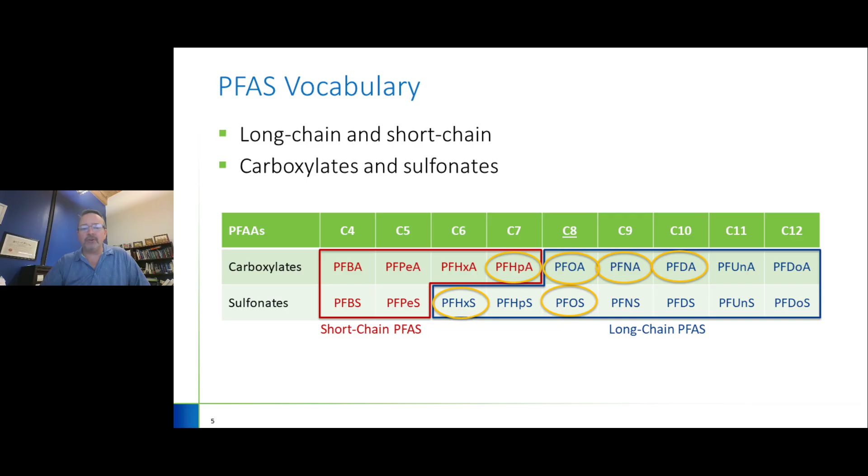Long chain PFAS are easier to remove, generally speaking, than short chain PFAS. The long chain PFAS are the ones that bioaccumulate in a person's body as well, and so that makes them important. If I picture bioaccumulating these long chain PFAS in the tissue of my body, intuitively that doesn't sound good, and they can build up over the years and cause me harm. So long chain PFAS has been the target predominantly, but short chain PFAS have come into greater focus in recent time.

We're going to talk about where these come from. This presentation is largely not a question of who done it, right? We're not trying to find the guilty parties. That's not the mission of this presentation. But inevitably, water suppliers or the customers will ask, where does this stuff come from? And it could come from a whole bunch of different places, which is fairly disturbing, right?

Facilities that use firefighting agents such as AFFF, aqueous film forming foams. Facilities like airports or fire stations have used AFFF for decades, and that is a PFAS-containing product. So if we're near, say, a military installation or an airport, an industrial facility that trains to fight fires, AFFF may have been used and may be a source of PFAS contamination when released to the environment. You can picture people being trained to put out fires, foam gets sprayed everywhere, and after the training is done, it's washed down into the stormwater and into the ground. So that's a common pathway.

Manufacturing air emissions is a disturbing pathway for PFAS. They can travel through the air, like the second bullet suggests. That's been the case in upstate New York, southern Vermont, southern New Hampshire, where deposition of PFAS through the air has been seen. And then there are other sources, right? Landfills are another potential source of PFAS release. It's been seen to be true.

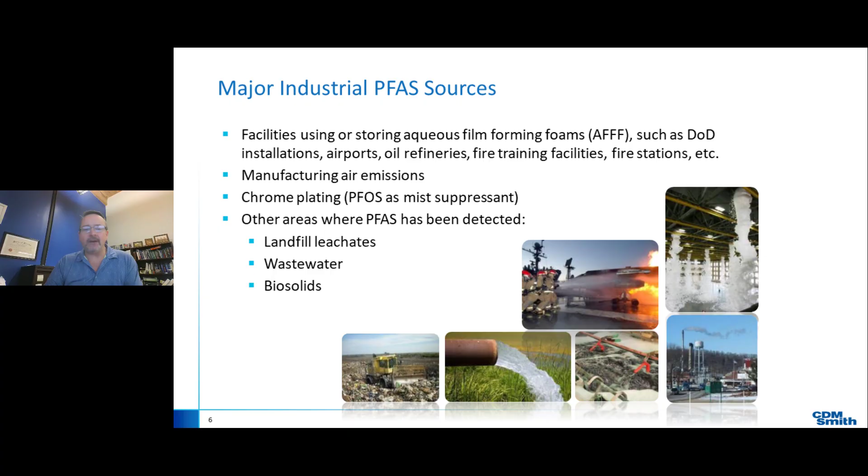Wastewater plants, unfortunately, are the unfortunate receivers of PFAS. Nobody should be mad at the wastewater people by any means, but it's received at the wastewater plant, as you can imagine. And inevitably, some of that can end up in the biosolids, which has been the subject of conversation in that aspect of our water wastewater industry. So PFAS is all around us, unfortunately.

Back in the good old days of 2013, UCMR3 had systems of a certain size, larger systems, looking for 6 PFAS compounds. So it was a select group of utilities at that time looking for a select group of PFAS. They were also looking at a very high detection limit relative to the detection limits that are available now. UCMR3 had a detection limit somewhere in the range of 10 to 90 parts per trillion, whereas now we're a good fraction of that, 1 to 2 parts per trillion.

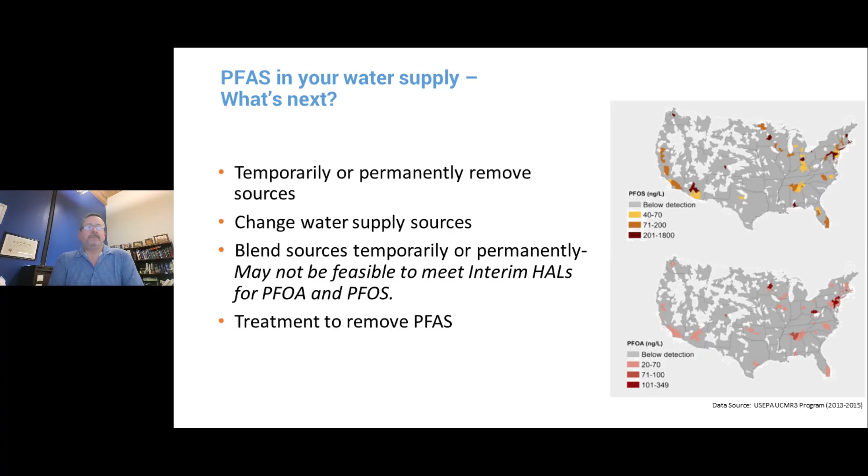Then, of course, fourth bullet, treatment to remove PFAS. We'll talk about that a good deal in this talk. I've alluded to the evolution of PFAS analysis. I don't come to you as a laboratory professional per se, but there are a variety of methods out there. US EPA method 537, 537.1 came along and expanded the list of analytes. UCMR3 had their own limits, which I alluded to earlier.

I should note that UCMR5, not on this slide, but UCMR5 is very convenient to the user in that they steer you toward what laboratory methods are acceptable for use under UCMR5. So again, point is that the evolution of laboratory methods has been noteworthy over the years. More in the way of evolution or progress over time, if you will.

The US EPA back in 2009 had a health advisory. They said, gosh, PFOA, PFOS, they look like bad actors, and we're going to put a health advisory, 400 parts per trillion, 200 parts per trillion. And those are very big numbers compared to what we're seeing now, right? 2016 comes along, 70-70. Post 2016, various states, I'll allude to that in a second, come out with their own take on how things shall be.

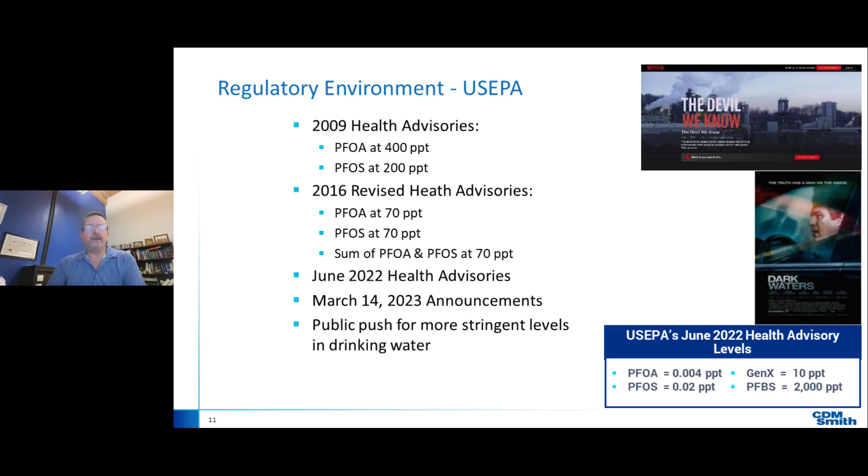As of last year, the state regulatory environment was really something else. US EPA had their health advisories, but not a nationally enforceable standard for PFAS. And with that, you had individual states making their own evaluation of toxicology and risk tolerance.

I alluded at the top, the US EPA announced some big stuff March 14th of this year, and I'll speak about what they announced. But that information was published in the Federal Register. We are into the public comment period, which ends May 30th. The US EPA is targeting a final rule to be published later this year, early next year. And compliance would be required, if all goes to plan, 3 years after that date.

Before we're done, I'll mention that figuring out PFAS and implementing a solution is possible within 3 years. There's a lot of steps to get through it, though. There's a lot of work to becoming compliant. What did EPA say on March 14th of 2023? They said, we are suggesting a draft MCL for PFOA, PFOS, both at 4 nanograms per liter, right? So it's measurable, but it's very low.

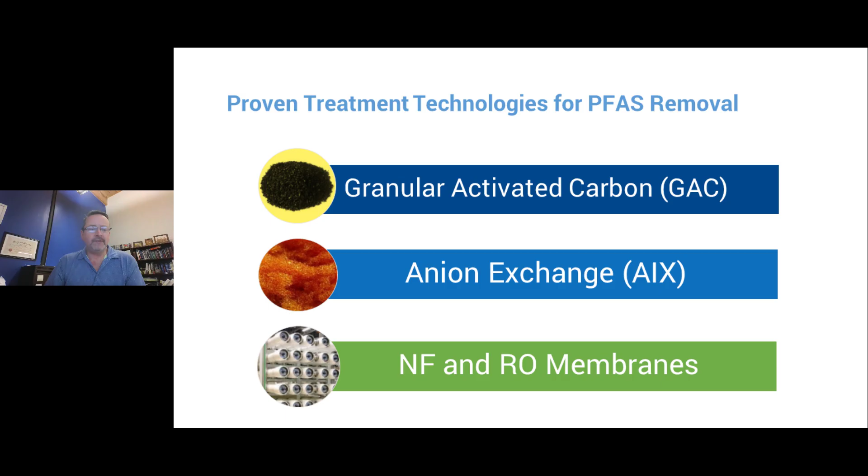I should add powdered activated carbon is also a possible solution. Powdered carbon has been practiced at plants for years for other purposes, but it's been shown to have some benefit in the world of PFAS management.

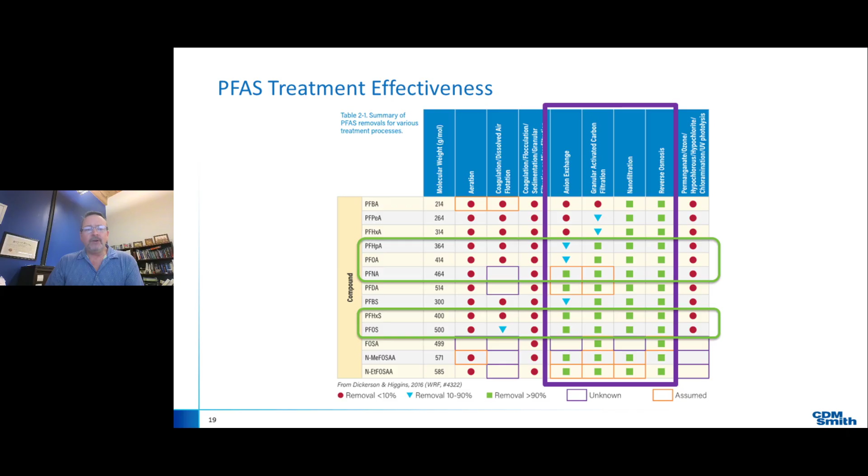If we look at a slightly aging Water Research Foundation review of PFAS treatment effectiveness, we see that the longer chain PFAS, and I've circled a number of them in green going down the left column, a number of longer chain PFAS are quite well removed by the technologies that I've described. And this particular WRF document also confirms what I was saying earlier. Some of the other traditional water treatment processes are ineffective at removing PFAS. So again, we're zeroing in on the treatment systems that do the job.

So the questions become, what PFAS compounds am I treating for? It makes a big deal if I have a bunch of GenX, which is not well removed by GAC, or if I don't. So, what compounds am I treating for? What's my state saying? And also now what's the US EPA saying? And am I designing to be flexible to meet future regulations if more compounds are regulated? So a bunch of PFAS questions to ask oneself, which is probably obvious.

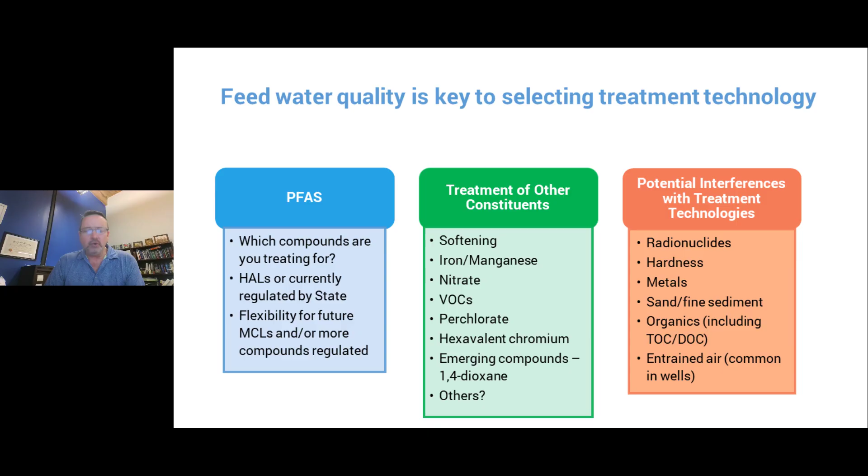Another way of looking at it, there's so much more than PFAS. It's an incredibly complex set of decisions to make in any treatment challenge, including PFAS projects. Yes, it's a PFAS challenge perhaps that we have, but it's also, am I considering the operations of the facility appropriately? Is it appropriate to put in a lot of complex stuff, or is it better to keep it simple because we're staffed only part of the day?

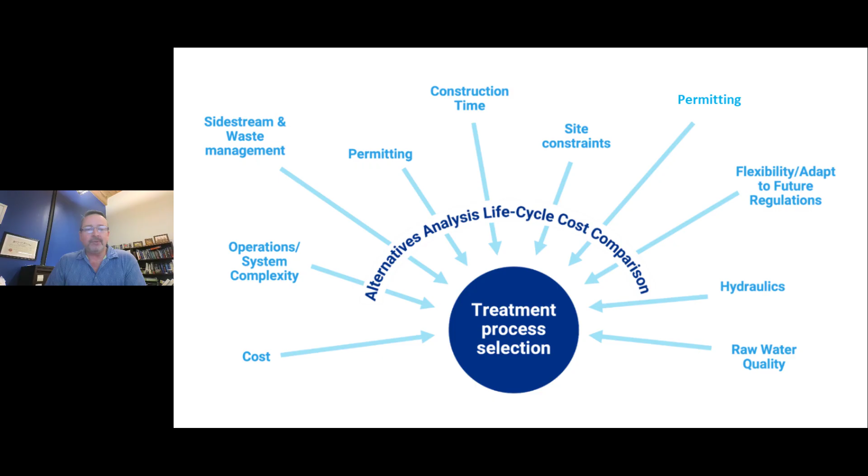Always got to figure out hydraulics at a given facility. Always got to figure out permitting. So it's a myriad of considerations. It goes way beyond just how do I remove the PFAS. It's all of that goes with it. It's good water system planning and engineering that is required.

A couple of quick examples in the simplest form. I might have a simple well pump, and we may be installing PFAS treatment, obviously, somewhere in this pipeline. And I ask myself some questions about what else might be in the water, right? So that's a fairly straightforward application.

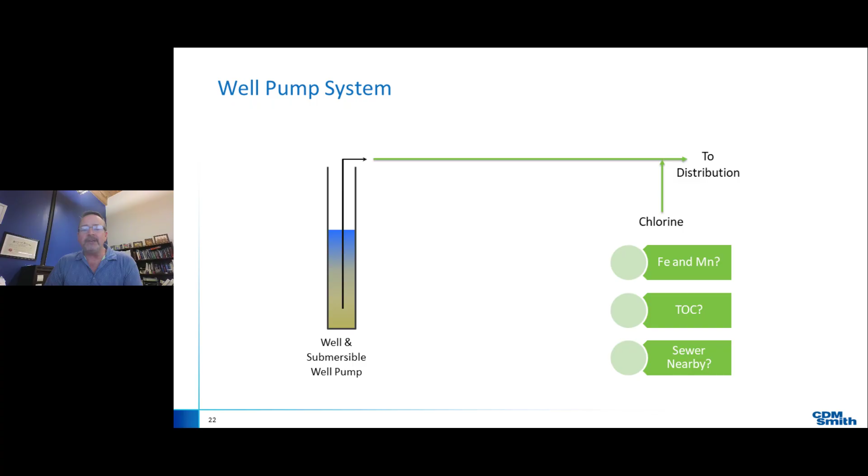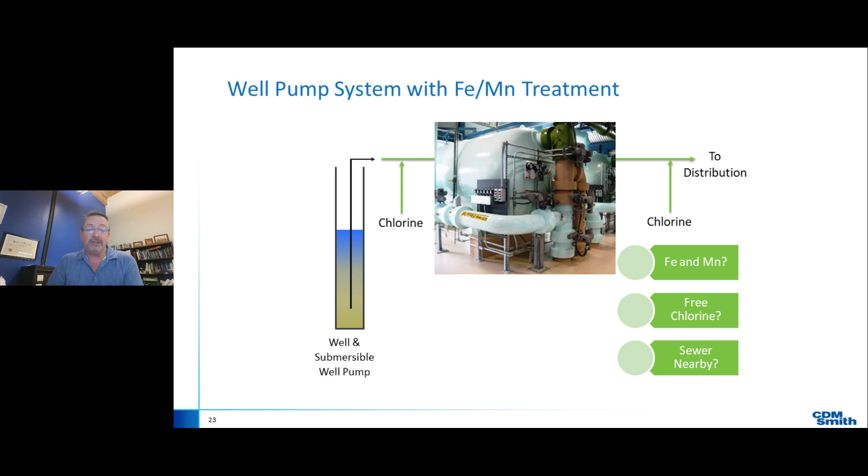Here, I might come upon a system that has a well pump and greensand filtration, let's say, for iron and manganese removal. And the question becomes, where do I put the PFAS treatment? Putting it before greensand might bury it in iron and manganese. It might blind the media. That has happened in some instances. Thankfully, not on my jobs. But, so where to place the PFAS? Probably downstream of iron and manganese removal. If I'm using anion exchange, I don't want free chlorine or permanganate going from greensand to my anion exchange. Got to think about that. And of course, is a sewer nearby.

And then here I have a situation, another just example. Maybe I have air stripping for VOCs. Where do I put the PFAS? Do I have iron and manganese? In this case, putting PFAS treatment downstream of the air strippers ended up being the ticket. It seemed that removing VOCs let a downstream granular carbon process work more effectively than if we asked the granular carbon to remove PFAS and VOCs. So always lots to think about.

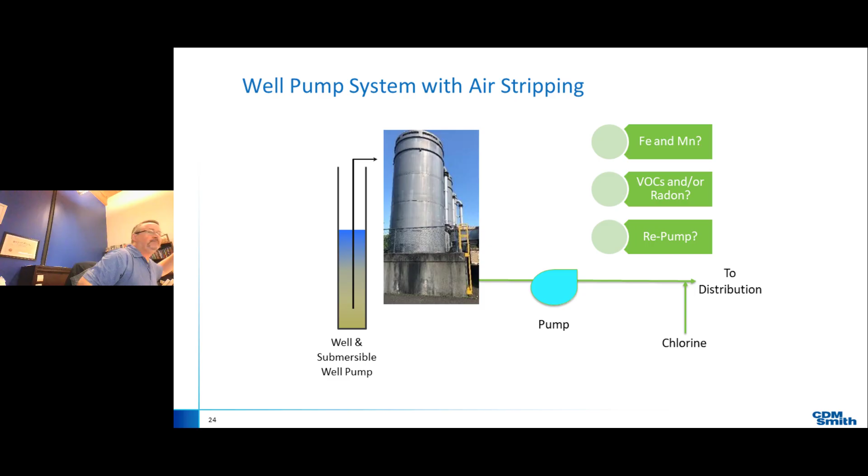A few words about the choice between granular carbon and anion exchange. Broadly speaking, we need lots of empty bed contact time, EBCT. And EBCT, empty bed contact time, is just a measure of how long the water is in contact with the media. And so I need a fair amount of contact time with GAC, but less contact time, appreciably less, with single-use anion exchange resin. That means I need a lot of GAC compared to less quantities of anion exchange to do the same job.

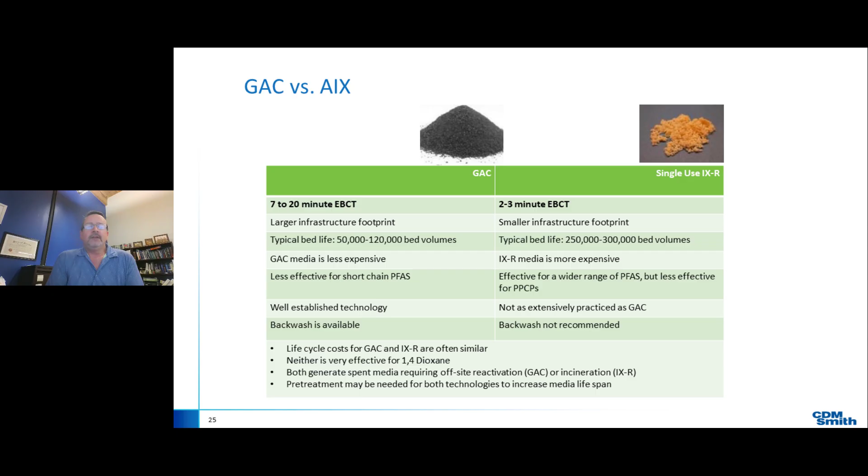The bed life is very variable. Sometimes it can be said that anion exchange resin lasts longer, but it's a very interesting economic trade-off. I've found remarkably that these capital and life cycle cost analyses are very competitive between GAC and anion exchange. And so, very interesting to see these play out. Both are reasonable and viable choices for PFAS removal, particularly in water that is low in TOC, low natural organics. I'm going to comment on a case study of some folks that have tackled PFAS already.

These folks get after it in late 2016. They're using GAC adsorbers. Those are the pressure vessels shown in blue in the top image. Between the lead vessel and the lag vessel, I'll explain that in a second, we have 20 minutes of contact time. Parallel operation is approved on this job when the city runs maximum flow 4 MGD, which is a rare event. So day in and day out, they're pushing around less than 2 MGD. And they do run in lead lag, through the lead, through the lag, and out the door.

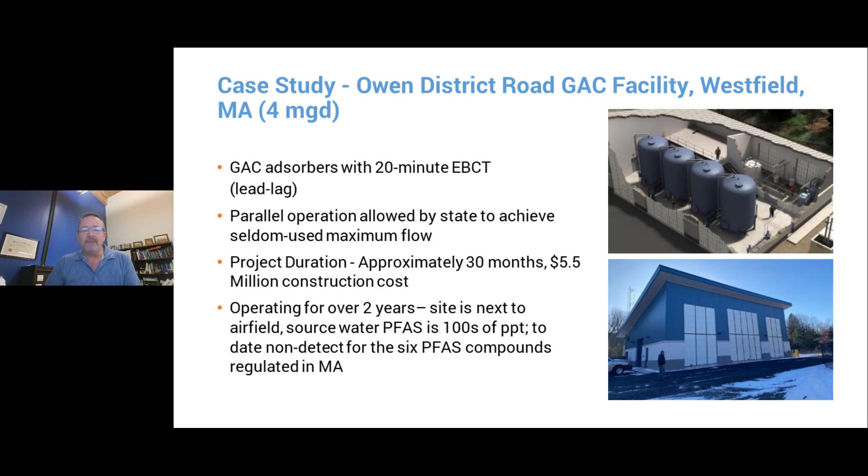This job took 30 months to execute, $5.5 million construction cost. These folks have been going over 30 months now, and they're next to an airfield, and their source water PFAS was, I think, 213 parts per trillion. The great news is they've been removing those regulated PFAS in Massachusetts to non-detect for over 400 million gallons of throughput over 30 months. And they have not backwashed once, which is a really good story. So if they can do it, others can do it too. That's a lot of PFAS to remove, and they're doing well.

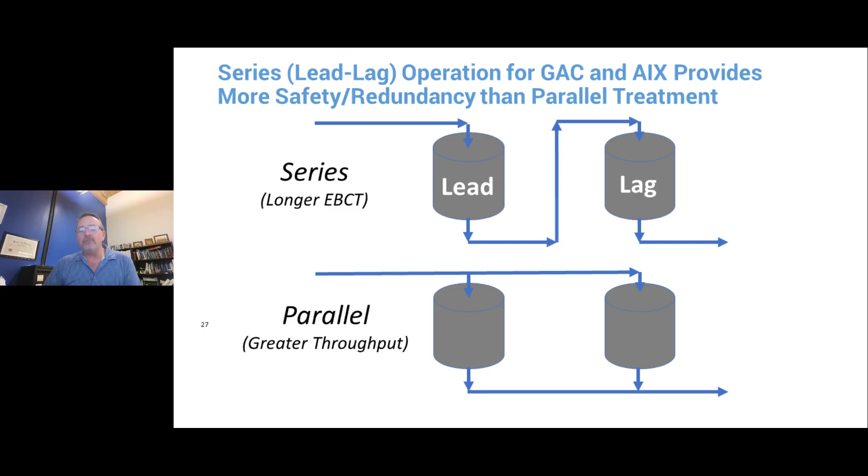Lead lag, again, quickly, running in series is also referred to as lead lag in PFAS world. I get a long contact time, EBCT, by going through one vessel and then the other. The lag serves as somewhat of a safety net. Parallel operation is legal in the states that I'm aware of, and that allows for greater throughput, but arguably less of a safety net downstream of the removal vessel.

Quickly on a large scale, Anaheim, California has a number of sites around the city of Anaheim, and they've gone with an ion exchange solution. That was identified as the preferred technology through some really good pilot work that OCWD and their consultants carried out. They have 9 systems in design and construction, treating over 70 MGD worth of flow. So that's a huge program. The job is very much in action now, but you can see they go from water supply well to pre-treatment in the way of cartridge filters. That's a prerequisite for ion exchange systems. It's a single-use IX system, and eventually out to the distribution system.

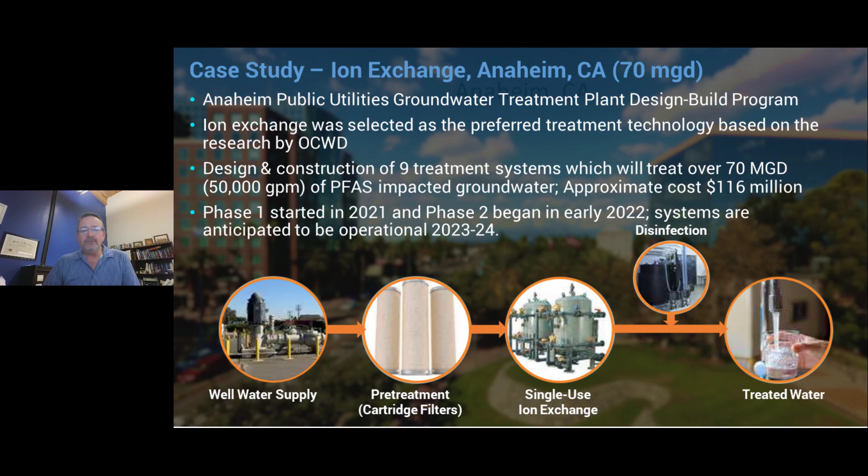And you can see there's all kinds of interesting arrangements, really, in any case. Here we are next to a tennis court, trying to not look too obnoxious with the new equipment. So some clever screening is put in to somewhat hide the system. This is a 4,400 GPM system. This would be much larger if it was GAC, right? More contact time, more media means more vessels, bigger vessels, and probably a more obtrusive aesthetic in the end. So ion exchange was attractive from an aesthetic, how big are the vessels perspective as well.

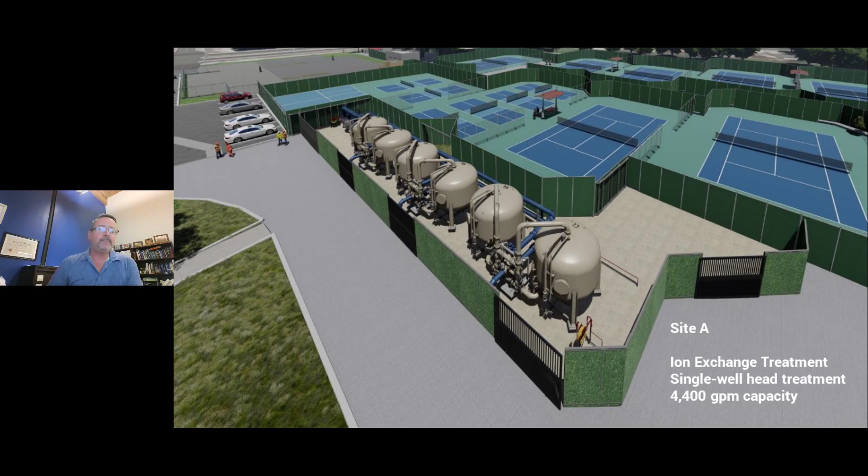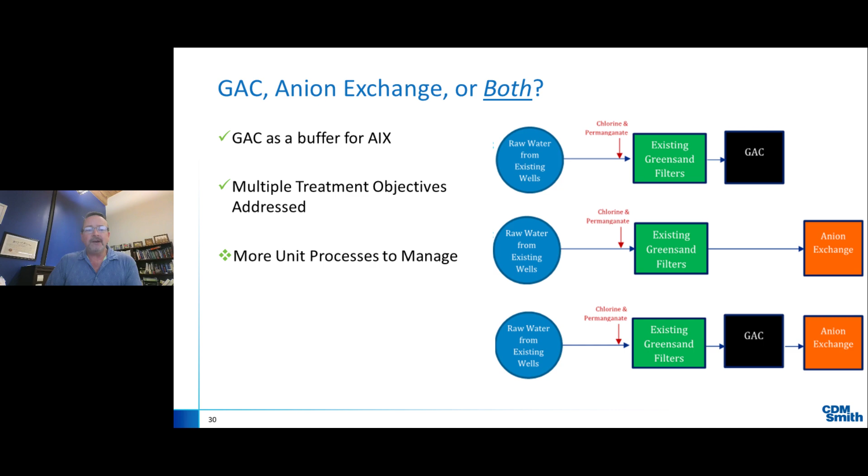Lots of folks have discussed using treatment media in combination. Some have said, can we use GAC as an upstream buffer for anion exchange, right? Maybe we remove some organics, or maybe we protect the expensive resin by using GAC up front. And perhaps that's an approach that allows multiple treatment objectives to be addressed, right? Maybe I'm shaving down TOC and then removing PFAS, and I'm reducing disinfection byproducts. Again, there can be consideration of multiple treatment systems in combination. It does result in more money, more unit processes to manage operationally, but it is something you see as you look around the world of PFAS in the United States.

Quickly, here's a case of folks that went all the way to reverse osmosis, low pressure reverse osmosis, LPRO. These folks are treating surface water from the Cape Fear River. They had PFAS, including GenX, which is somewhat prevalent in North Carolina and a fair bit less prevalent elsewhere. But it's GenX, it's other PFAS, and it's other contaminants of emerging concern. So there's a lot of stuff to remove, not just some long chain PFAS. And in the end, LPRO is the right choice for these folks. 48 months, $70 million, and LPRO was the preferred choice for these folks. So at 41 MGD, that's a large case study, and it was the right solution for them. And again, it's absolutely on the table, particularly as shorter chain compounds come into focus in the world of PFAS.

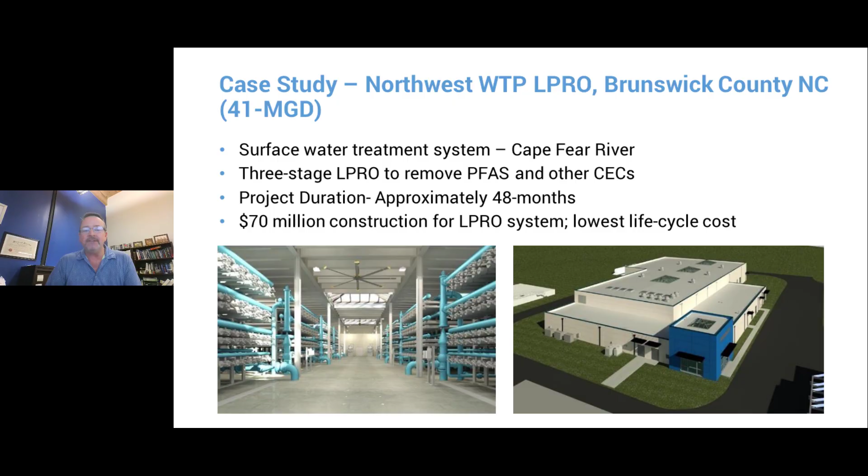We're going to talk about testing, design, construction, operation. There's a lot to be said for doing a bit of testing before we go hog wild. Rapid small-scale column testing is a proven technique in the laboratory in a controlled environment to examine a given source water and how it cleans up with various treatment media. And I think this is incredibly important.

We do this at my company in our laboratory, and it's an opportunity to see which commercially available product will perform best. In my view, I'm happy to send a system's water to the lab, have it run through 2, 3, 4 different products and see which one works best. It's pennies on the dollar. It's darn good insurance. I don't want anybody spending significant money constructing a treatment facility only to be disappointed at the results after it's built and started up.

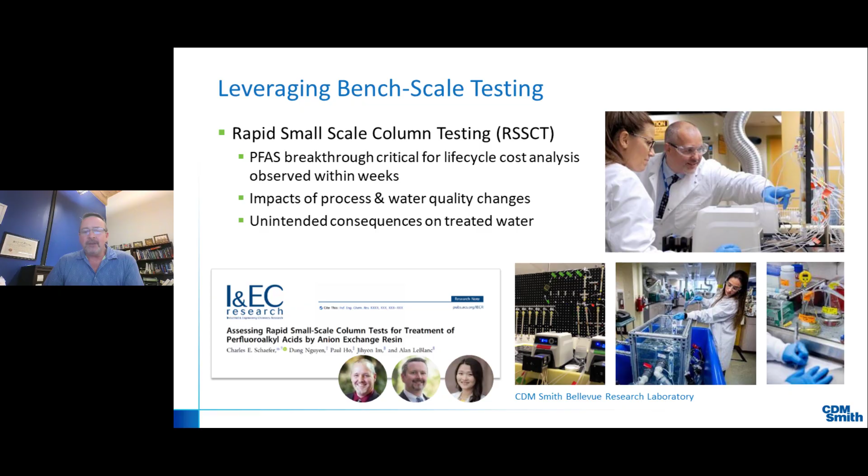So again, we do this without bias. I don't care what product wins the race. I just want to know which one works best. And I think it's effort well spent.

RSSCT, rapid small scale column tests, they've been used for PFAS compounds, including on anion exchange resin. This is a newer concept, RSSCT, typically for GAC, but on low TOC waters, it's been demonstrated to be applicable. And again, the benefit of this RSSCT, we get results from a controlled laboratory setting quickly. We are not waiting on a lengthy pilot scale test to play out.

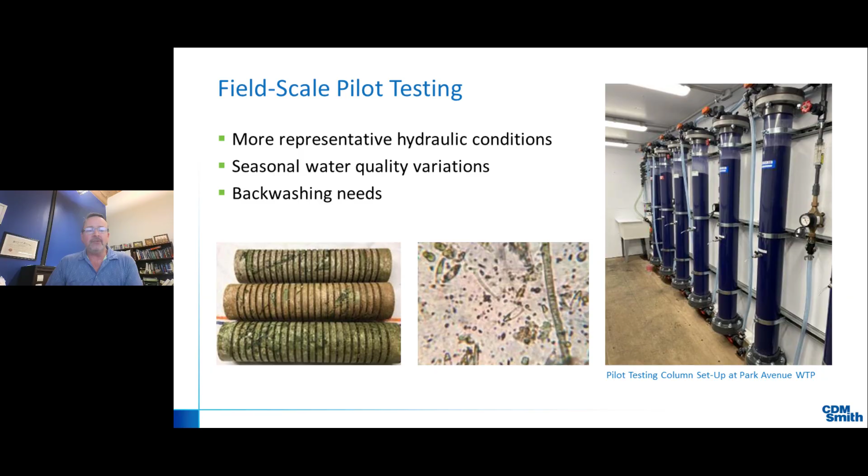However, that is not a disparaging comment on pilot testing. Pilot testing can follow laboratory RSSCT work. Pilot testing certainly can catch the real world hydraulic conditions in the field, the starts, the stops, the seasonal variations. It can really shed light on how things will play out at full scale. We've seen refinement of our design concept in the field through the use of pilot testing. So good value in pilot testing, not always mandatory, but often good value.

As I've stated a couple of times, the PFAS challenges we have are way more than just PFAS. I know when I'm hiring people, we don't necessarily need 500 PFAS scientists. We need people that understand infrastructure just as much as we need those PFAS scientists. So it's how often am I backwashing, and when I do, where's that waste going? It's considering the architecture involved with these jobs, right? Suddenly I have a big treatment system where I had none before, and how am I going to house that?

If I'm in the southwestern U.S., it's outdoors. Northeastern U.S., it's probably indoors. And what's the building going to look like, and how am I going to get it permitted? All kinds of other practical considerations. Dehumidification for indoor pressure vessel installations. Am I leaving appropriate media delivery provisions in my civil design? And am I considering the myriad of state and local permits that are always at hand?

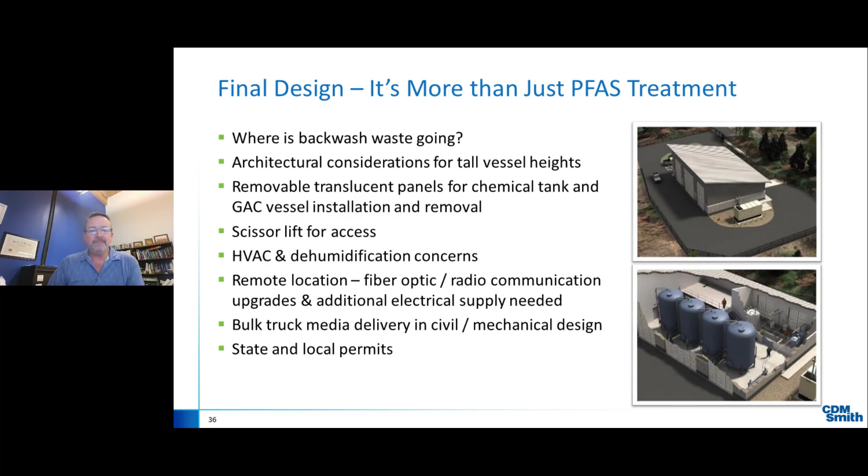I should say there's never relief. The regulatory people are sympathetic to those that have PFAS, but you still have to go through all the hurdles to get a project implemented. So it takes a good team to get through these things.

And operationally, we're simply cracking a ball valve, filling a collection container, and sending that water out for PFAS analysis. And we're seeing how we're doing with the PFAS migrating through the media bed. Where is the so-called mass transfer zone migrating down to? When it starts migrating toward the effluent of the vessel, it's an indication that we need to get a media change out scheduled, right? The media is exhausted, got to change it out.

But to be clear, there is no online analytical equipment at this point in time. We don't have like a turbidimeter or an online pH analyzer. There's no analogous online equipment for the plant just yet, unfortunately.

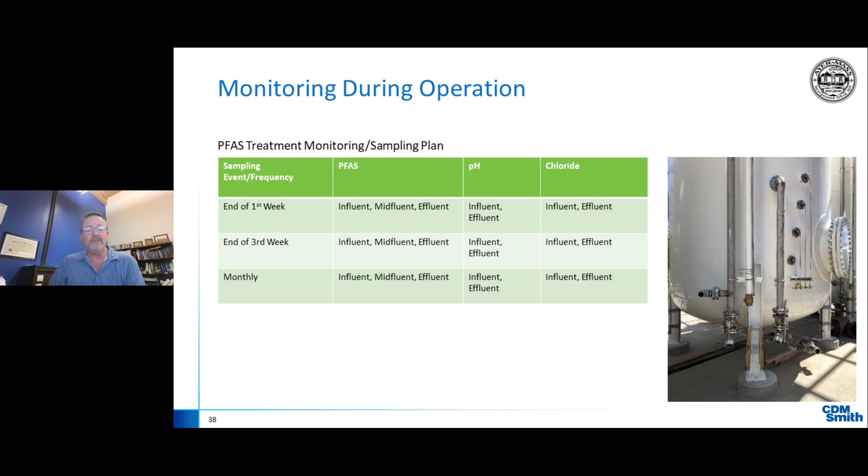Startup considerations, there's always a ripple or a nuance everywhere. GAC, when we put GAC in service, pH coming off the GAC is typically kind of high.

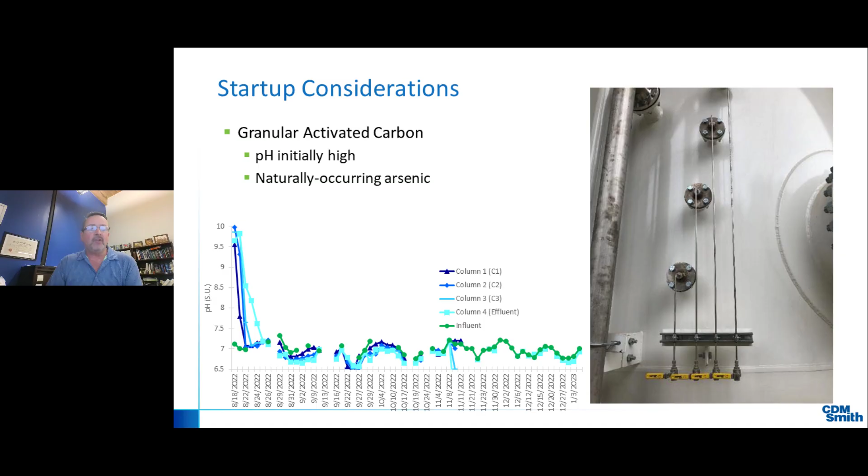And it takes a little bit of throughput to return to more normal pH values. That's a common thing. There's also the lesser known fact that arsenic can be present in the GAC product. It's just a function of nature where coal comes from the earth, and sometimes it comes from the earth where there is also a bit of arsenic. And so it can take some washing of the GAC, in the forward flow direction, to ride through and wash out any naturally occurring arsenic in the product. So that's probably not something the carbon industry has talked about a lot over the years, but it's certainly a word to the wise, something to look out for.

Similarly, in the world of anion exchange, there's no free lunch. The anion exchange systems will typically, when they're brand new, discharge chloride to the water and remove sulfate from the water. And so the chloride to sulfate mass ratio can be very skewed during the initial operation of an anion exchange vessel. And if it is very skewed and very different than what is historically done, it can alter the corrosion characteristics of the water.

So again, I think attention is required to the water quality coming off of the anion exchange shortly after it's installed. And again, that can be overlooked. I find that anion exchange resin vendors are very knowledgeable people, but there are some instances where those individuals are not necessarily drinking water practitioners and are not necessarily in tune with that consideration.

A few more comments to bring us home. PFAS media handling. If we're thinking about a carbon solution, we may ask, well, how long does the carbon last? And it's widely variable. In one case, there was a prediction of 27,000 empty bed volumes, which is a number that's difficult for most people, including me, to understand. But in that case, that translated into a 1-year life of activated carbon removing PFAS. And that was specific to one of the case studies that I mentioned.

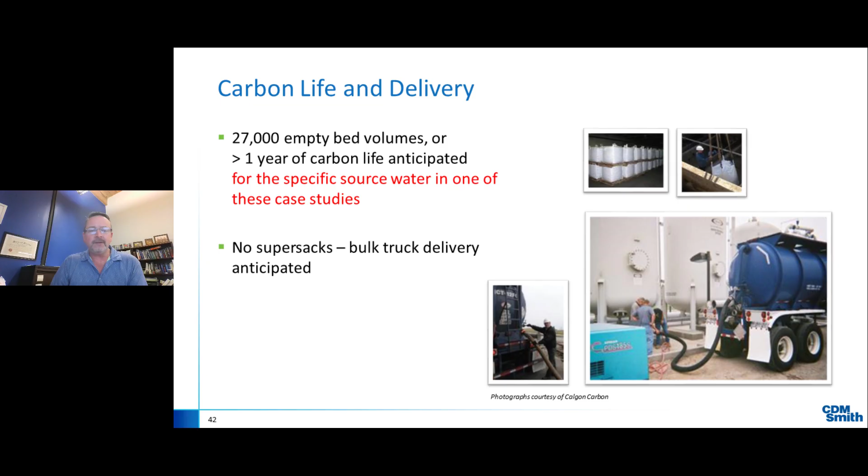Another hugely important question, what is the fate of the spent media? In the case of GAC, it could be sent to a landfill when it's exhausted and can't adsorb PFAS anymore. It's got to go to a proper landfill. It could be incinerated, where people thermally destroy PFAS at an appropriate temperature. And in the case of carbon, it can be reused again once it's been reactivated. So that's a few comments on where carbon goes.

With the resin, it's similar with a little bit of a difference. So it could be landfilled properly. It could be incinerated to destroy the PFAS. But if we take an incineration approach with anion exchange resin, single use, it cannot be reused. It's destroyed and unusable after that incineration occurs.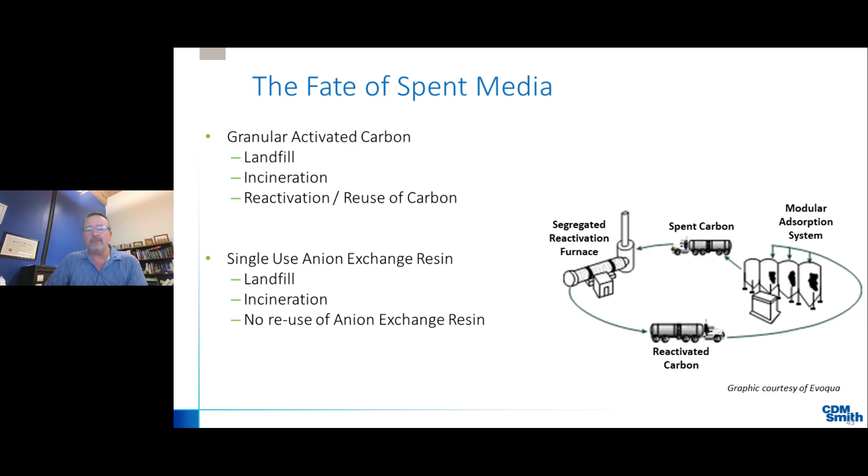So a lot of interest in what will become of my spent media. Some folks, I'll just say it, they don't want to be owning that PFAS-laden media forever, right? So landfill disposal is unattractive to some who are concerned with being associated with that material forever. So lots of considerations there. I'm not advocating one versus the other. They all come with cost implications.

A word about the future as we steer toward the end. The first bullet on the left, media separation: GAC, anion exchange, or so-called novel adsorbents, which are kind of like the first two. Media separation is proven, and it's being practiced successfully, as I've said in this presentation. Liquid to liquid separation, membrane processes are also doing good. NF, RO, nanofiltration, reverse osmosis.

There is some work with foam fractionation beginning, but as we go down the line here, concentrating and destroying PFAS, that is hopefully the future of our industry, where we can actually deal with the PFAS entirely at the treatment facility. That would be fantastic. If I can concentrate the PFAS into a very high concentration solution and then destroy it on site, so-called zap it with electricity, that would be fantastic. And it would get us out of the mode of owning spent media and shipping it off site. These approaches are not ready for prime time at water treatment facilities of any appreciable scale yet.

However, there's great research in the industry by R&D or entrepreneurs or engineering companies like mine. There are a lot of folks researching these things. There's a lot of promise, say at Superfund sites where concentrations are higher or where throughput is lower than many MGD. I would suggest that we in the industry pay close attention to the concentration and destruction techniques that are being developed, support them, and be ready to embrace them.

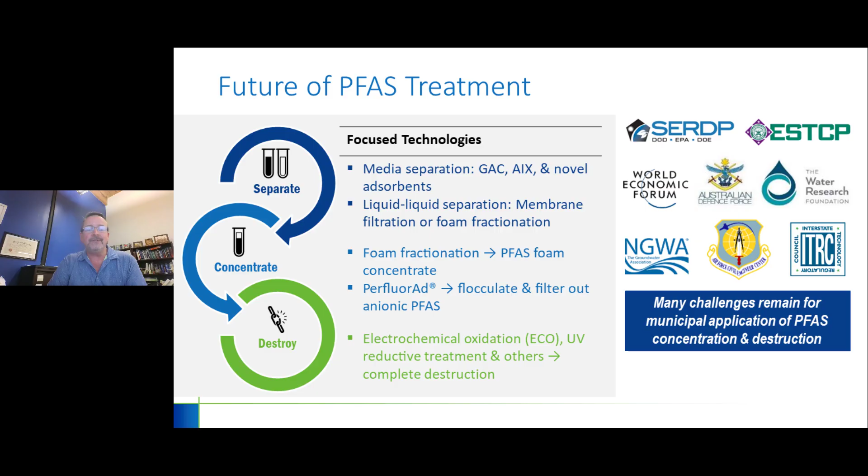Take-home messages. This will be my last slide. So, number one, hopefully we've made the point that it is an emerging issue. Regulations are still emerging. The US EPA's March 14th stuff is a draft. Public comments are coming in. And so, that's not cast in stone yet. And then, of course, treatment practices are still evolving. So this is a very active area of water practice, to say the least.

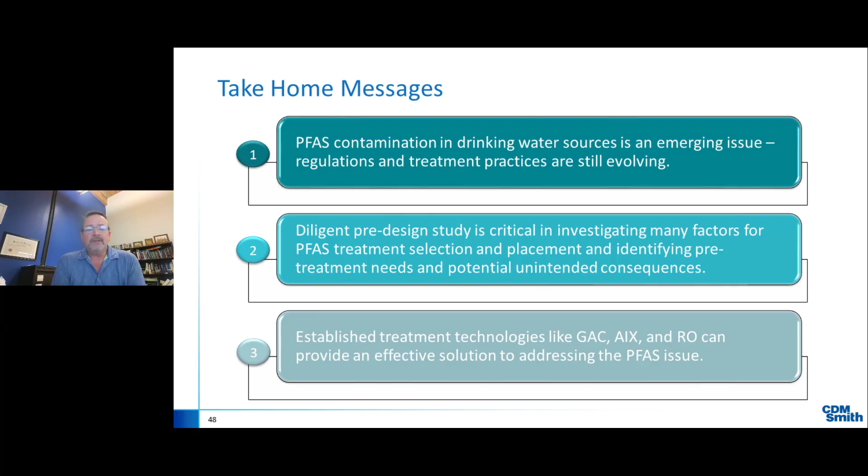Take home number three, there are some established treatment technologies out there, GAC, anion exchange, RO. I demonstrated GAC can remove over 200 parts per trillion to non-detect for a good duration, as can anion exchange. RO is removing all kinds of compounds in one of the case studies that I mentioned. So there are some arrows in the quiver to tackle these challenges.